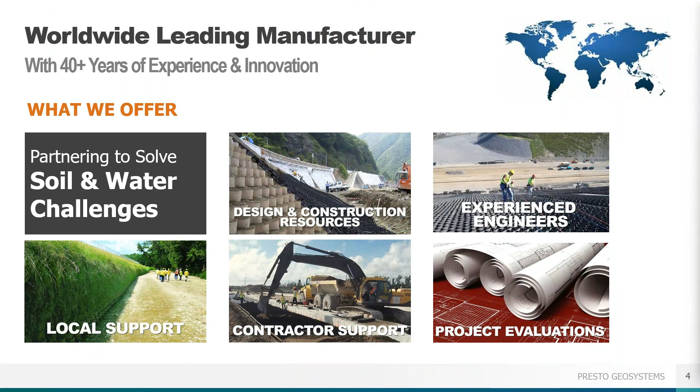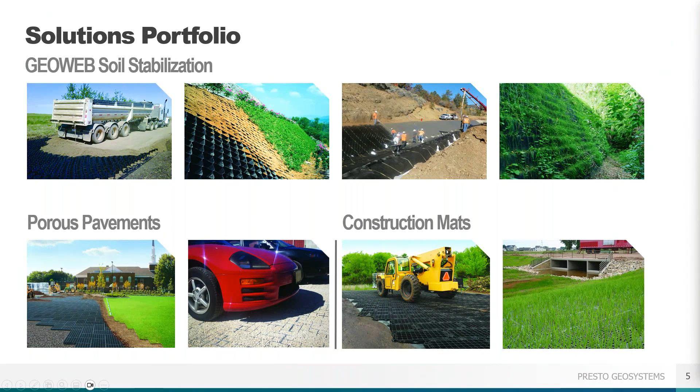So we operate in 4 main product areas. We talk about load support, slope protection and channels, which we're going to talk about today. We also can do earth retaining walls, whether that's gravity or reinforced walls. We can also do steep and reinforced slopes. We have 2 different types of porous pavements. We have our GeoBlock, which is a vegetated solution, and GeoPave, which is aggregate. We also make some construction mats called GeoTerra for temporary access, and also some GeoRunner, which is also one type of slope protection, but we're not going to be touching on that in today's presentation.

First, we'll do a little bit of overview if you haven't really been involved with projects with Geocells, what they really are. So the products come in 3 different sizes. We have our 20V, which is about 8.5 inches, 30, which is 11.5, and 40, which is 18 inches nominal diameter. We have different cell depths from 3 to 12 inches. And we also have different section lengths from 18 cells up to 34 cells.

If it is a larger project, we actually can make a specific cell length, basically to reduce any type of waste you may have with the panels. So we do offer a free project evaluation for all of our projects, no matter if it's 500 square feet or 5 million. It's going to include a written summary, calculations, cross sections, specifications, and this evaluation will determine the appropriate cell size and depth for your project.

I really do, and I'll probably say it a couple times, please don't use any standard tables or graphs when you're doing a geocell project, because really every site is different. Especially on slopes and channels, depending on what's underneath it, the anchorage is going to be different. So whenever you don't use standard tables or graphs, we're available. These evaluations are always free. We can turn them around typically in about a day or 2.

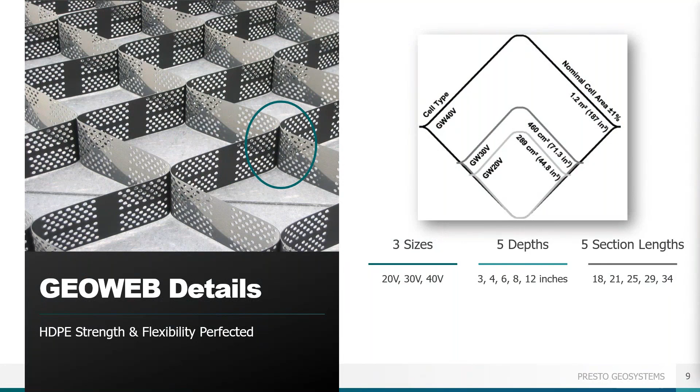So the ultrasonic welded seam that connects all the cells together, this really is crucial to the functioning of a geocell. The stronger the seam strength, the better performance, period. You've got to have a strong seam. We are made from 100% virgin HDPE, which provides the strongest seam strength. If the cell wall is too stiff, it can overstress the seam and potentially cause failures. That's caused by people adding things like calcium carbonate to it, or things to lower the cost. So it gets too stiff, and the seam can actually rupture in the field.

So the second characteristic is the infill material. There are 4 basic types. We can fill it with coarse sand for load support applications. When we invented this with the Army Corps of Engineers back in the 70s, we actually called it sand grid until we went commercial with it in the 80s when we changed it to GeoWeb. So for any kind of load support, we can use coarse sand.

For slopes and channels, we can use topsoil and vegetation, usually with some type of surface protection like an erosion control blanket, a TRM, or hydro seeding. We can also fill it with aggregate. I'll talk about the research we've done for both of these. And also, if it's a really hard armor system, if you really need some big time protection, maybe against erosive flows or high tractive forces, we can actually fill it with concrete.

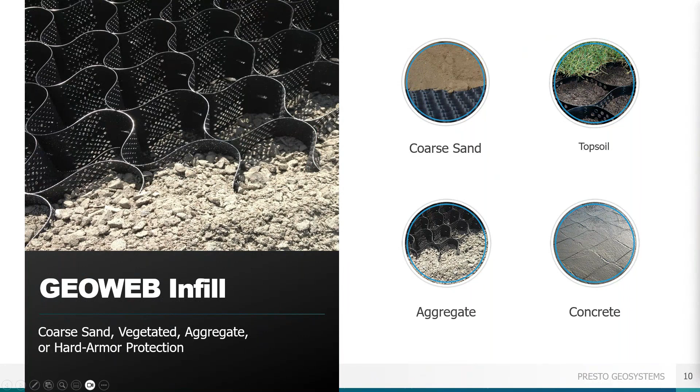Here you can see a typical panel, comes tri-folded on a pallet. Each panel is about 8.5 feet nominal width, with different cell lengths. Like I said, it comes trifold on a pallet, so it ships very efficiently.

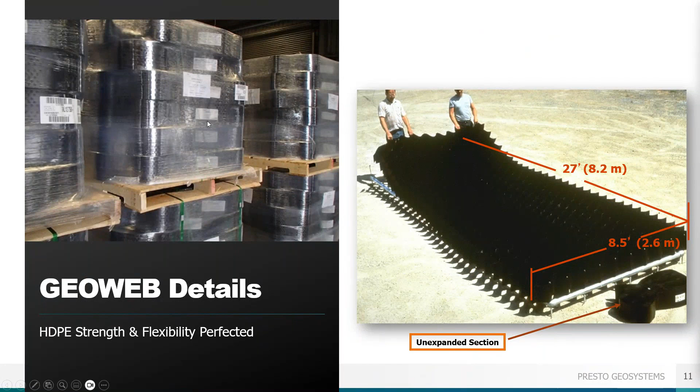We actually do have a factory here, located in Wisconsin. We build all of our GEOWEB, so it ships very efficiently out of Wisconsin. All our accessories and the GEOWEB are 100% made in the USA under a strict QA/QC program. They do comply with the Build America, Buy America BABA Act. So if you have a project, all of our accessories, all of our everything is made here in the US. We don't offshore any type of materials. We can provide certifications for you if that's required.

It's manufactured from high quality virgin HDPE. It's proven the durability over the past 40 years. We've looked at different ways to maybe make this different, but it comes right back to the same formulation every time we test it. 100% virgin HDPE is the best quality, gives you the best seam strengths. It lasts hundreds of years.

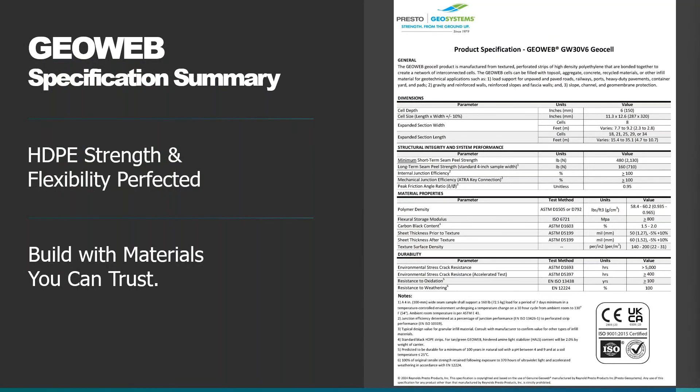The carbon black is added to protect it against UV, but really a lot of times it's buried in the ground. So even with 24 hours sun exposure, GEOWEB lasts 100 years before the carbon black is degraded. So it's going to be in the ground for a very, very long time.

All of our components are actually engineered depending on the type of application you're looking at. This is for slopes and channels. Here we have the ATRA stake clip, and I'll talk about that. We have our ATRA key and tendon clips, but all these accessories here are actually engineered for direct use with Presto GeoWeb. So whenever we do a project, these are all the accessories that you'll see.

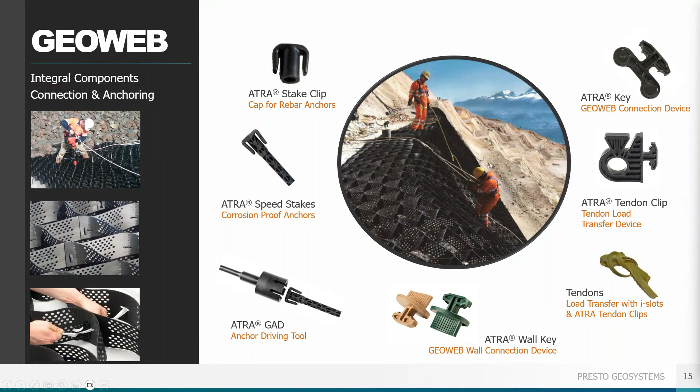All of these accessories we actually engineered from scratch. None of them are off the shelf. All of them are used with our design evaluations.

So the ATRA key, that really is the crucial point. That really makes sure that the panels stay together. It really does speed up installation. Made from plastic, so they're going to last pretty much a lifetime. It really helps to make sure that the panels remain securely connected and they don't separate.

And it really does avoid corrosion. When we first invented this, we used to use metal staples, but over time, that's going to corrode. So you want to stay away from metal staples, and also zip ties - zip ties aren't made to attach geocell panels together. You want something that was actually engineered to connect GeoWeb panels, not a zip tie off the shelf.

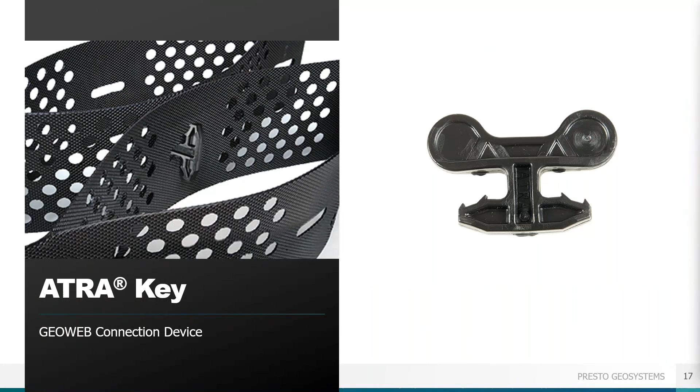Here's another close-up photo showing the ATRA key. You can see that one of the most recent innovations we had is we added these frictional barbs right here on the inside of the capture key. So it basically just gives you a little bit better interlock between the different panels.

When we do our evaluations, we're looking at the seam strength as the biggest thing. So we're looking at factor of safety for connection failures, like shearing, splitting, or tearing. We make sure that the ATRA key has a high enough factor of safety that you never have to worry about panel separation in the field.

These are some anchoring, we call them ATRA speed stakes. They're made out of plastic. Typically used on 2-to-1 slopes and less, unless there's a liner. We're going to usually anchor it, unless it's a very, very long slope. These are, like I said, 100% plastic. They have frictional barbs on them to enhance the interlock.

You can see we have an ATRA stake clip molded right onto it. Here's an ATRA stake clip. The ATRA stake clip fits onto a number 4, so a 1/2-inch rebar. We also have this little GAD that goes on, and you could actually drive these in with a Hilti hammer, a pneumatic hammer, versus having to drive in with a hammer. So they go in very fast.

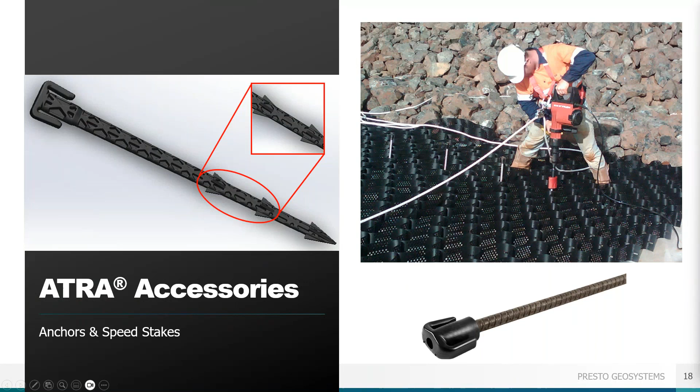So all these accessories are for less than a 2-to-1 slope. If you get over a 2-to-1 slope, usually, or over the top of a liner, we're typically going to use tendons and ATRA tendon clips. So what the tendons do is they run the length of the panels, and we connect these ATRA tendon clips.

We tie them off on a specified number of cells down the slope, and we'll tell you in the evaluation how many cells - typically anywhere from 4 to 8 cells. You can have an Atra tendon clip, and you can see how the tendon just twists around the Atra tendon clip.

What this does is it transfers the weight of the soil infill and the GEOWEB panel up to the crest of the slope. We're typically going to have a pipe dead man buried up on the crest of the slope where we can tie the tendons off.

If a pipe dead man doesn't work, a lot of times we'll use earth anchors. So we'll work with you and your earth anchor manufacturer to make sure that we have the correct strength.

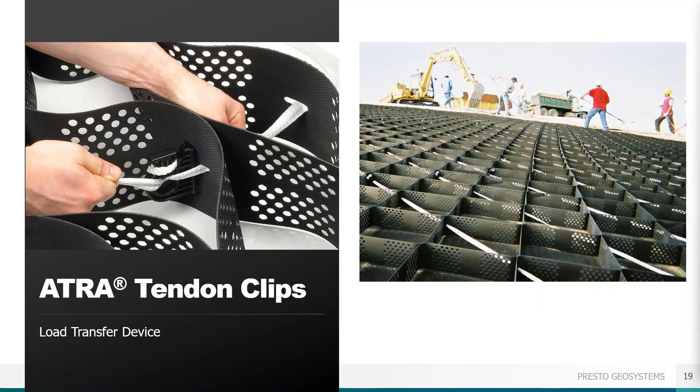One of the best things about our system is that we've tested it over the last 40 years. Some of the most recent testing we've done is at the Colorado State Hydraulics Lab. Pretty much anything that's subjected to water is tested at this lab, and Dr. Thornton is worldwide renowned as far as hydraulic testing.

One of the good things about it is it's located in Fort Collins, Colorado, but it's located about a couple hundred feet below the Horsetooth Reservoir. So it has a couple hundred feet of static head to actually serve the flumes inside of this building, and they also have some outdoor flumes.

So we tested all the different types of infill for channels and slopes. We tested topsoil with a TRM, we tested aggregate, and we tested concrete. The first one I'm going to talk about is vegetated infill.

Here you can see the first step is we took their flume box, filled it with topsoil, covered it with a NAG C350 erosion control blanket. What we wanted to do is see what the ability was to withstand high velocities and shear stresses, tractive forces. But the other thing we wanted to look at is how we compared to riprap.

You know, a lot of projects we do around the world, riprap is becoming hard to find, and it's becoming very expensive, not only to purchase but also to transport and place. So we wanted to see how a vegetated GEOWEB system would compare against different sizes of riprap.

So we did a total of 10 tests. Each test lasted an hour. We varied some conditions - the bed slope, the slope angle. We did testing in accordance with the erosion control blanket standard for ASTM, which is D6460.

That standard is based on two things. We had to have a soil loss after the 10 one-hour tests of less than half an inch, and we had to have a blade density of at least 300 blades per square foot. So we had to meet those conditions after 10 one-hour tests.

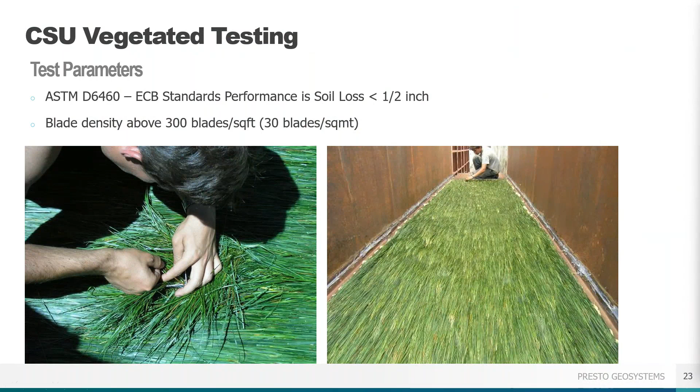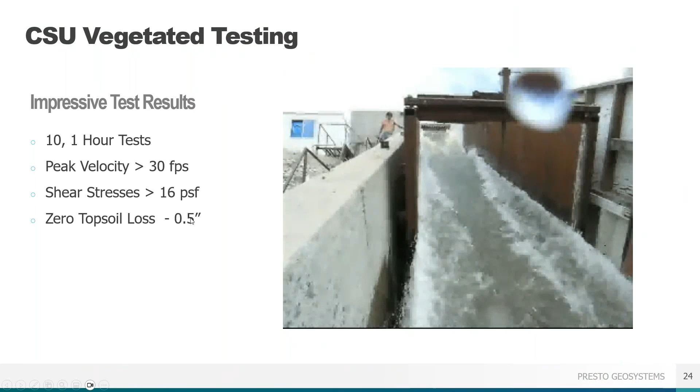So like I said, we did 10 one-hour tests. We had velocities over 30 feet per second. We had shear stresses approaching 16 PSF, and we actually had zero topsoil loss, and we always had more than 300 blades of grass per square foot. So it's a very successful test.

Here's really a quick comparison when we're looking at the allowable shear stresses, which is in blue, and the velocities here in red. Here you can see a 12-inch riprap, shear stresses of less than 5 PSF, and velocities less than 15 feet per second. When you look at GEOWEB and the C350, we were more than 3 times the shear at over 15 PSF, and double the velocity, approaching 30 feet per second.

So, you know, if you have a temporary installation where you've got to put riprap and you're having a hard time finding it - it's really a big cost issue for a lot of places - and it's not fully underwater, a vegetated GEOWEB solution is able to replace riprap. We actually have models that we can go through and determine the size of riprap that's needed for all of your installations.

And here you can see this was the NAG C350 TRM. Basically, we doubled the performance of that erosion control blanket. So a very successful test all around.

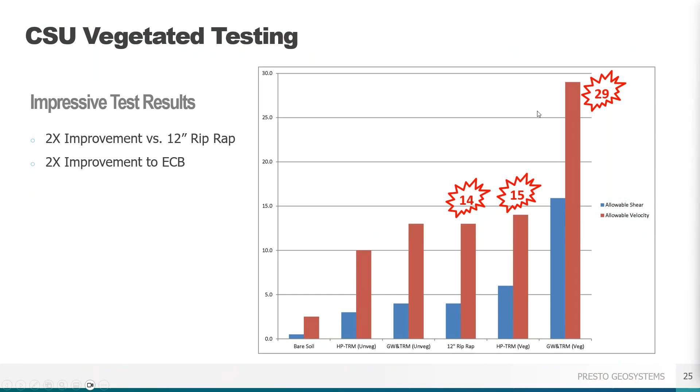Just to talk about a couple vegetated slopes and channels - we do a lot of work down in Florida, around Texas, the Gulf states where you get a lot of hurricanes. We do a lot of stormwater channels. This project was a stormwater channel, with frequent hurricanes, channel floods, and severely eroded channel slopes.

So once again, we came in, got these side slopes excavated, put down the GEOWEB, filled it with topsoil. And how we do these channels most of the time is we have aggregate filled below the water line and up to about 1 or 2 feet above the normal water line to give it a little bit of freeboard, and then you can see the vegetated slope above it.

So as the hurricane water comes in and the water rises, the vegetated GEOWEB protects the slope. But we also have aggregate down here to protect the slope at all times when the water is flowing.

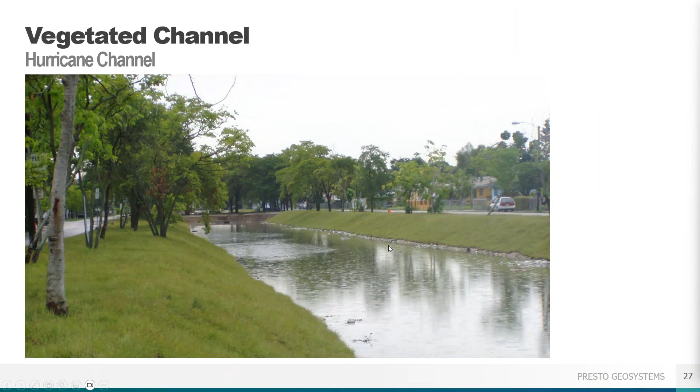We also do a lot of these, another type of stormwater channel. This is actually a retaining wall. Here you can see GEOWEB is very easy, it's plastic, so it's easy to cut for pipe penetrations or anything like that.

Here you can see a GeoGrid. This was a reinforced slope because the batter was less than about 20-25 degrees, so you can see some GeoGrids holding it back. They fill the back of the walls with free draining material for reinforced slopes, but the front we can fill with anything from topsoil to aggregate to concrete.

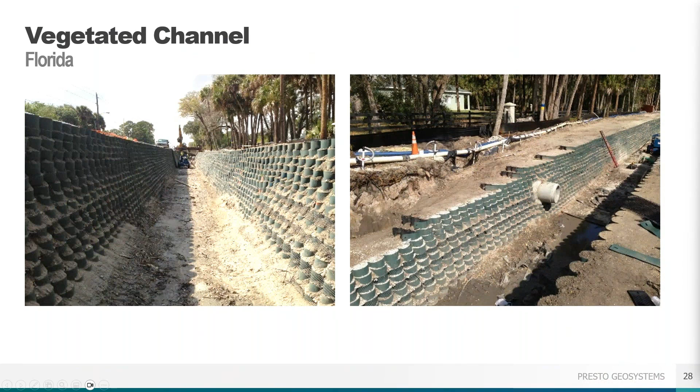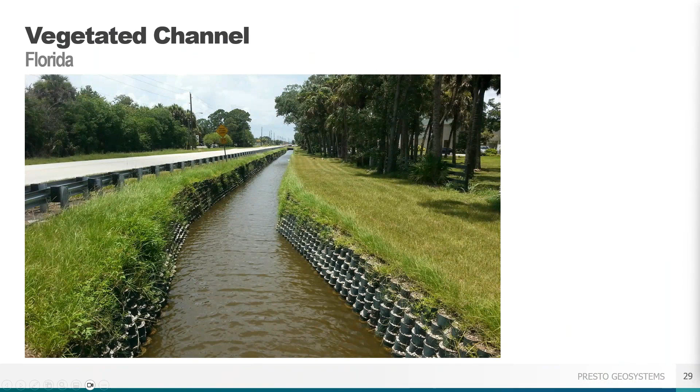They wanted a vegetated solution, so we did a mixture of aggregate and topsoil. Here you can see the channel, with still about a third aggregate, two-thirds topsoil mix visible. This was taken a couple months after the channel was done, and here you can see full establishment of vegetation.

So most of our GEOWEB slopes and channels, you're not even going to see them. They'll be covered with vegetation if that's the intent. The GEOWEB really provides a good way for that vegetation to be held inside those cells. We have tens of miles of these hurricane channels all around, whether it's the slope channel or the reinforced slopes like this one. We've had very successful installations. If you have any type of channels like that, we'd be more than happy to help you out.

This was a very interesting project, we'd like to show this one. This is out in Vegas. When they get water out there, it's usually a lot of water at one time, like when snow melts coming from up above, they see a lot of water.

What happened here is a lot of water was flowing down this area. It's on the north side of the strip, and across this wall are some very nice houses. An engineer from the city looked at doing something here. The original intent was to maybe do some gabion baskets, but the neighbors found out what that was going to look like, and that wasn't something they were happy about.

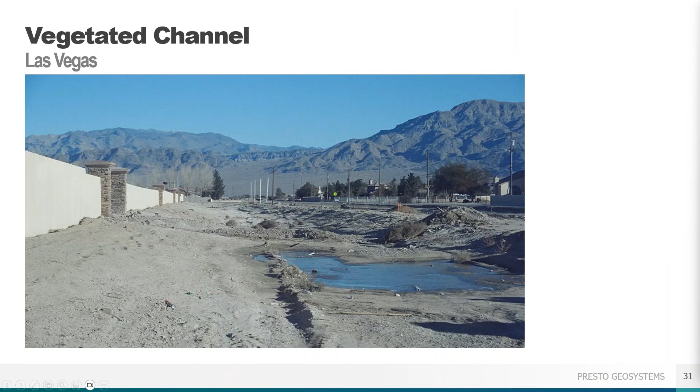That went to the city and the engineer, and they came to us, and we turned it into a park. Instead of using gabion baskets for this whole area, which would have been pretty much a useless area, we were able to turn it into a park. You can see they wanted quick vegetation here, so they sodded it, and put a sidewalk down it. Every time the water flows, it comes through this area and flows right out with no issues at all. We were able to reclaim some land for them to use as a little exercise and park area.

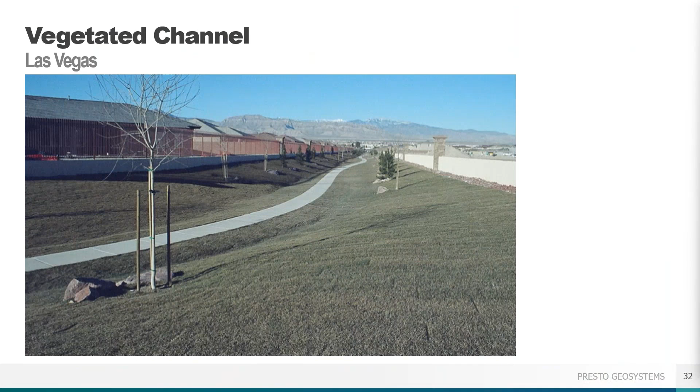This is something we come across all the time: people will try to do this on steep slopes. This is an airport in Colorado, and they were having really big issues with this site. They tried all kinds of different things. They tried hydro seeding without anything else, but the slope was too steep and the hydro seed wasn't holding. They tried a wire mesh, and you can actually see the wire mesh if you look close, but the same thing happened, it didn't hold.

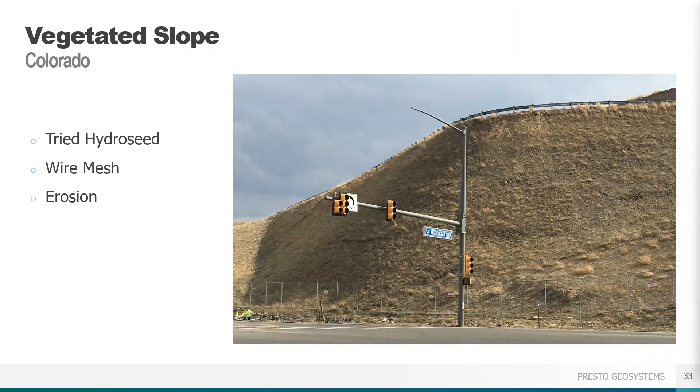So they approached our distributor, and we did a free project evaluation for them. Due to the height of the slope angle, we used tendons and our tendon clips. When you do these slope projects, you're always installing from the top down. You pre-assemble the GEOWEB panels on the crest, get a dead man pipe or earth anchors installed, tie it off, and then basically throw the GEOWEB panels down the slope and pull them down.

So all the tendons or the ATRA tendon clips can be installed on the top, meaning everything can be done from the crest of the slope.

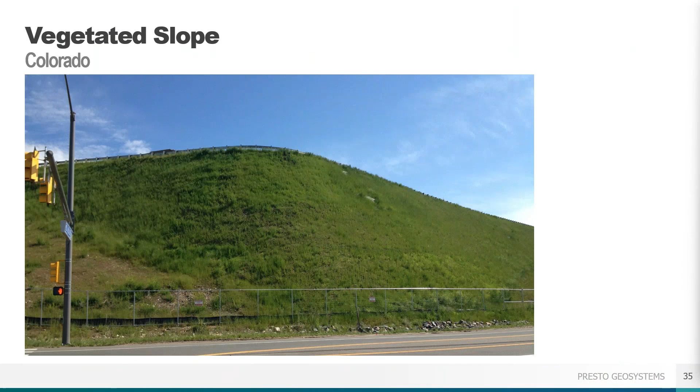Here you can see the finished solution. You can already see vegetation establishing. This was on the northeast side, so it's not getting a lot of vegetation, but this was taken maybe 4 months after, so it's really vegetated and finally had a solution that wasn't sloughing off when they'd get heavy snows or snow melt or any kind of melt from the airport.

This was a mine closure site we did down in Peru. This is a really tough one. It had 4 25-foot high terraces. Terraces were a little over 60-degree slopes, so very, very vertical.

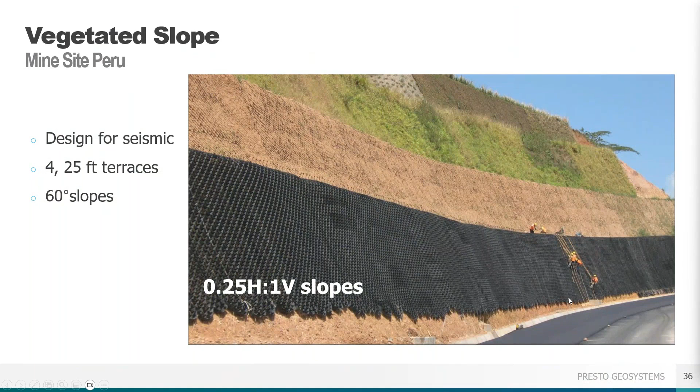Here they wanted a vegetated solution. It was a mine reclamation project, so there were specific guidelines they had to adhere to. So we did the free project evaluation. Here you can see looking from the crest of the slope as they're installing it. All 4 terraces here were designed somewhat the same.

They were all the same as far as the lifts and the slope angles. So you can see these 2 were already constructed and vegetated. This one is just starting to vegetate, and the GEOWEB coming up here. Once again, we have tendons with tendon clips. This was buried to earth anchors at the crest here.

You can also see they put down a coir fabric and some rock, basically because water would be coming down. It was directed through these channels all the way from the top to the bottom. A lot of water did come down the slopes too, because during the rainy season you're going to get a lot of water, so we had to design for that in our evaluations.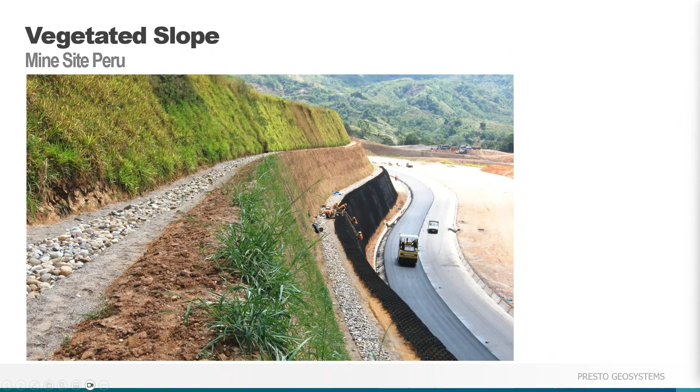They also put in a biaxial geogrid to have a little bit of extra stability under the panels. And here you can see the final installation taken about a year later. You can see it's fully vegetated. They went through a rainy season without any issues, and that GEOWEB is still working great today, about 8 years after it was installed.

Here's another typical installation. We do a lot of liner protection, whether it's on coal ash plants, landfills, any type of liner. If you need some protection, we can put GEOWEB. We can add topsoil and vegetate, or we can add aggregate. Different solutions we've used. We have lots of case studies here.

This one, they wanted a vegetated solution, so we put down a non-woven geotextile to protect the liner, then the GEOWEB. And we ran tendons, once again, with the pipe deadman at the crest of the slope here. The pipe deadman was buried into the liner trench. One recommendation I'd make is that if you're putting in a liner, especially if it's got any slope to it, try to use a textured liner.

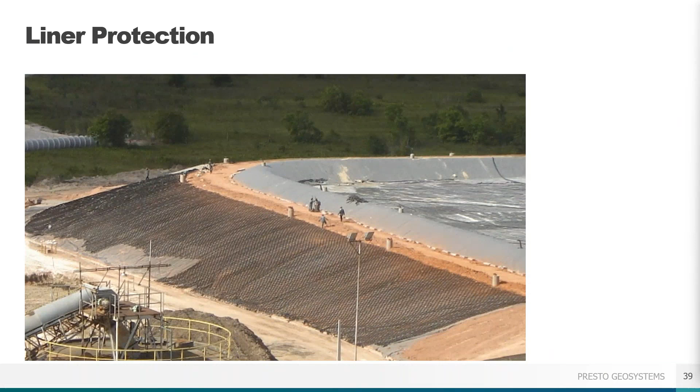The friction angle between any type of surface protection, say for instance GEOWEB, and a smooth liner might be in the low teens. But if you use a textured liner, they're in the low 20s. So it's significant when you're looking at trying to anchor in the anchor trench. Usually we can always anchor in the same anchor trench as the liner, but once again, we'll do a full project evaluation to let you know what the anchorage requirements are. And this is the installation after vegetation was established.

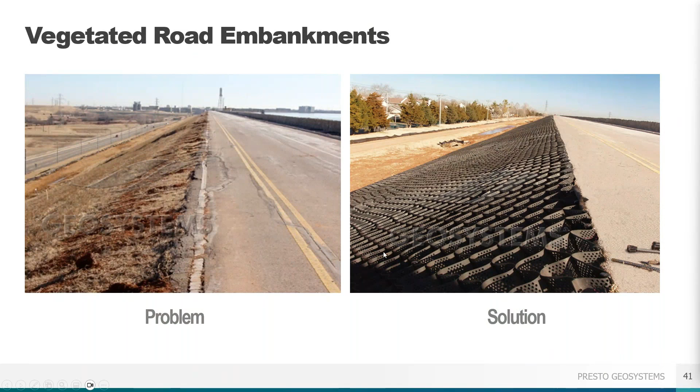Seems like we're always doing one of these every single day. We're working on one of these projects around the world. So you can see this is a 2-to-1 slope, and we used the Atra stake clip and number 4 rebar on this one, driven in on about a 3x3 cell pattern. So you can see the problem, the solution with the web, and then what it looks like after it was vegetated. Another successful project.

We do a lot of roadway embankments. This is actually on a railroad, out in Montana. This is roadway and rail, but this is for the rail. You can see they wanted a vegetated solution. Once again, this was also a 2-to-1 slope. You can see down here, we did use tendons on this one because they didn't want to have to go on the slope, so we actually used tendons for the installation. But you can see what it was here, and then after vegetation was established.

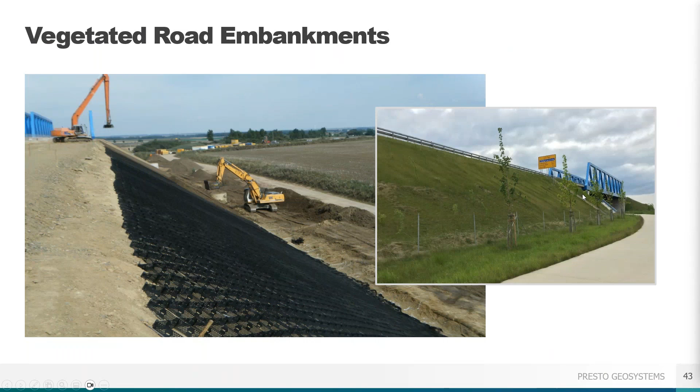We can also do very steep slopes.

So we can do very steep slopes. If you have something with very severe limitations, like trying to do something with a house above it, we can provide an evaluation for a vegetated solution.

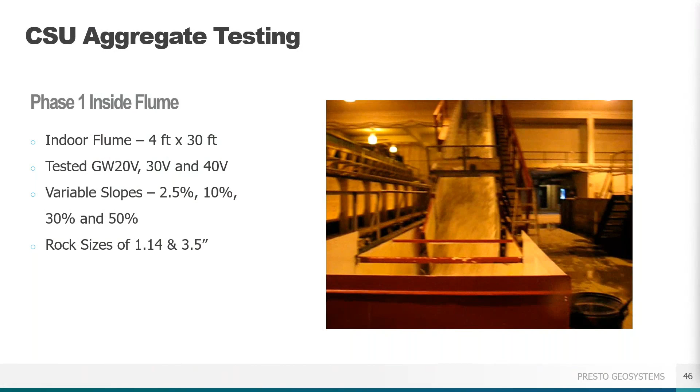So the next one is aggregate fill. Aggregate fill is a little bit different. We did different cell sizes. We varied the slopes from 2.5% to about 50%. We also changed the rock sizes. We ran, once again, 10 different 1-hour tests. You can see here what it looks like as the...

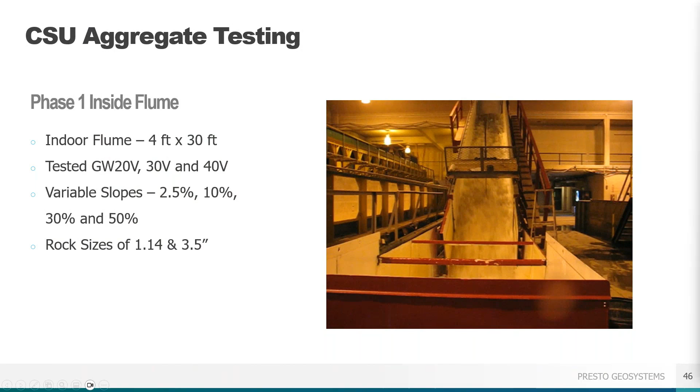So what we found out from this one is that we actually maxed out the flume inside at Colorado State, so we went to the outdoor flume. We did 5 total tests, keeping the slope pretty consistent at about 17%. Flows up to 125 CFS. We did the rock size at 1 to 2.5 inches.

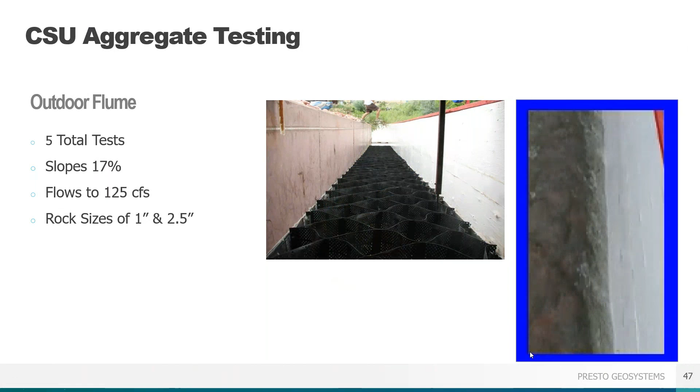If you look closely on this slide, I'll run this. This is one of the 5 tests. You can actually see the aggregate being confined inside the GEOWEB.

So the intent of doing the aggregate testing was twofold. We wanted to look at, once again, replacing riprap. We wanted to see if you couldn't use a vegetated channel, as I showed in the previous section for our testing at CSU, maybe under constant flow or a lot of flow. We wanted to see how we compared to riprap.

So, like I said, the output was Dr. Thornton and his PhD students did a linear regression analysis for us. Based on these velocities of 18 feet per second and shears to 16, we can actually reduce the rock size or riprap size up to a factor of 10 times.

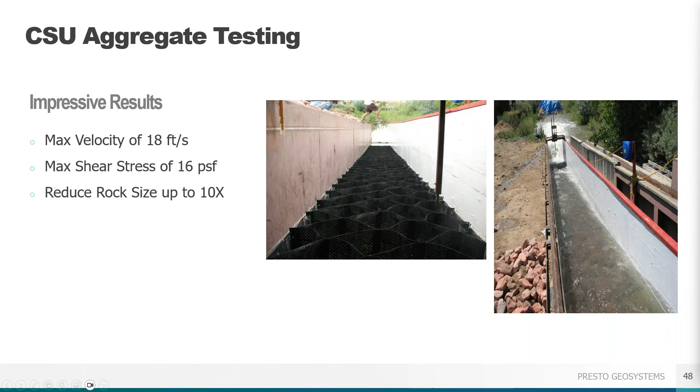So, based on your site, we can run this model, and I've run this model thousands of times since we've had it. Basically what we're doing, all I need is the slope, the flow rate, and the bed width. So if you give me those numbers, I enter the slope, I enter the flow rate divided by the bed width to get unit discharge.

I'm basically changing the size of infill material. What that does is show you a comparison between maybe 2 different formulas for size of riprap, the Abt and Johnson one and the Army Corps of Engineers. It also tells me what size of GEOWEB - remember we talked about the 20V at 8.5 inches diameter, to the 30V which is 10.5 to 11, and the 18-inch for the 40V. It'll tell me which one is going to be the best fill material for it.

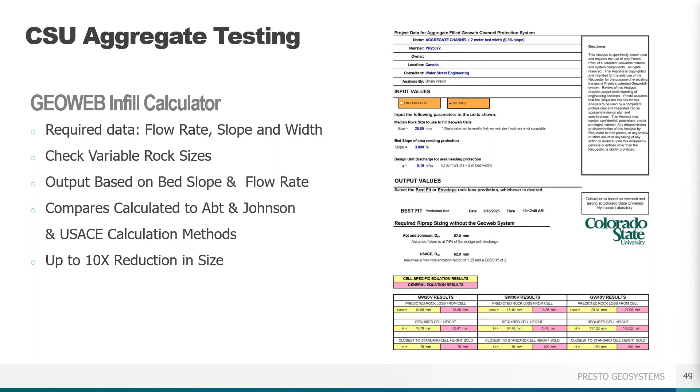From that evaluation, we can go ahead and provide a free evaluation for you that gives you the size of the GEOWEB, the depth, and the infill size.

So it's a project we did out in Arizona, for the Gila River Indian Reservation, south of Phoenix. Once again, just like that Las Vegas case study, when they get storms, they're very intense, leading to erosion and flooding in adjacent subdivisions. They also use this area as a roadway to get up into the mountains.

So they had to do something to repair it, and it was really critical because the flooding in the rainy season was going to come out in Phoenix, so they had to make sure. This one is about a mile-long channel, and it came from the bottom of these hills. It ran through, and a bunch of other channels actually came into this one.

So we did the full evaluation here. We recommended 2 different sizes of GEOWEB, a 6-inch on the uphill side and a 4-inch on the downhill side, where some of the other channels were coming in. You can see here the pre-folded panels. We did put a non-woven geotextile underneath it just because it was pretty sandy, so we didn't want to have any scour below it.

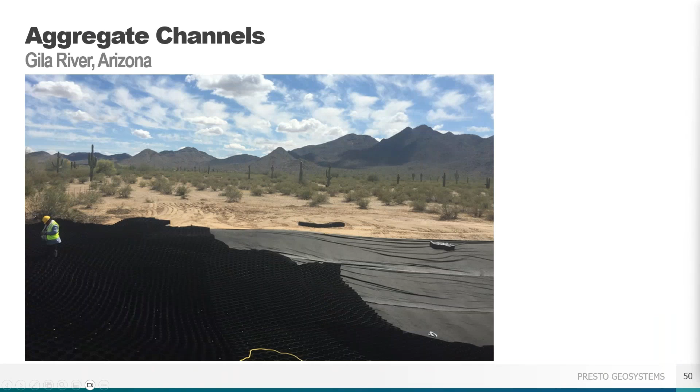Basically we just cleared the existing vegetation, got down to that sandy subgrade, graded it, and compacted it. What we did here, it was up to about 100 feet wide in certain areas, so it's a pretty wide channel. We wanted to have like 3-to-1 side slopes as the final grade. You can see these yellow hoses - that's for the Hilti hammer, a hydraulic hammer, because they're driving in anchors just to keep the GEOWEB from moving.

You can see the stakes. They're getting ready to be driven into the ground.

But on this one, we did about 42 different options, looking at 42 different stations and flow rates, bed sizes, and rock sizes to determine the best infill material.

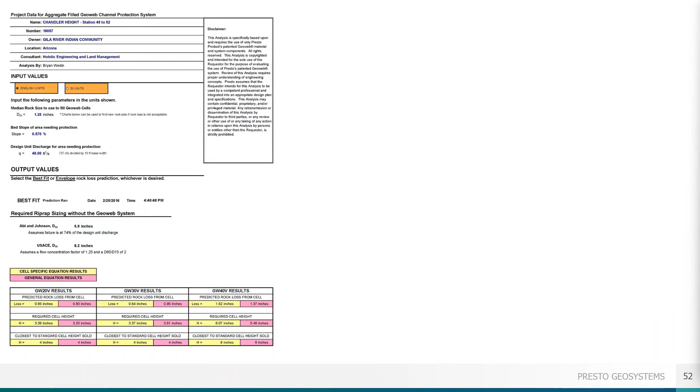So a couple of basic channel calcs. After running the calcs, we had all these different types of channels. We came up with some different rock sizes, but we actually settled on a local 1.25-inch crush material that was locally readily available and at a pretty low cost.

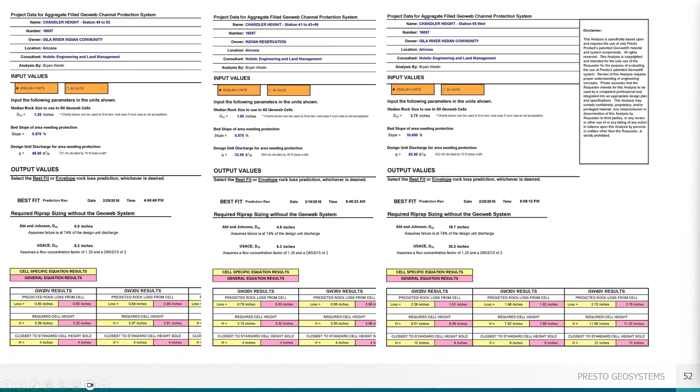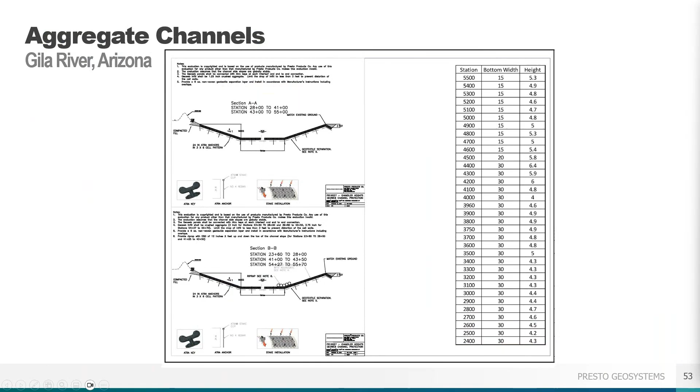We used that to fill the GEOWEB panels, and you can see here cross sections from all these different stations. On one of the sheets you can see different heights and bottom widths. Every one of these stations we provided evaluations for, to make sure we had the right rock size and the right cell depth.

And like I said, the infill was waste rock from a nearby quarry. It wasn't the greatest, but it was locally readily available, and it went down very quickly, saving them a lot of money. I mentioned before that they would use this route previously, before it got severely eroded, as a way to get up into the mountains with UTVs and vehicles.

So that's one of the really big advantages of using GEOWEB confined for aggregate. Once this is down, you can use it as an access way, so all the construction trucks - we looked at the CBR, the subgrade, and made sure this wasn't going to damage any of the cells.

So we're doing a load support evaluation in these cases, along with the slope and channel evaluation. It actually served two purposes.

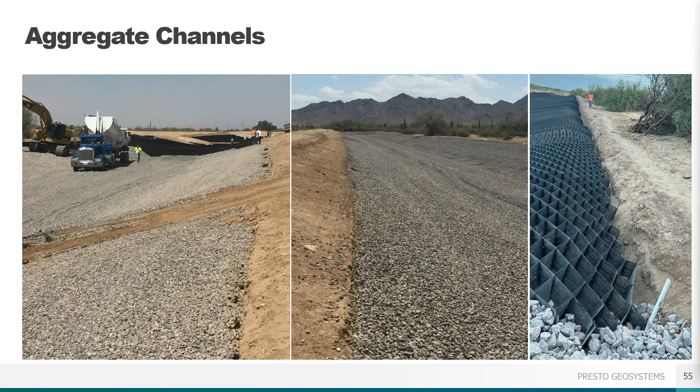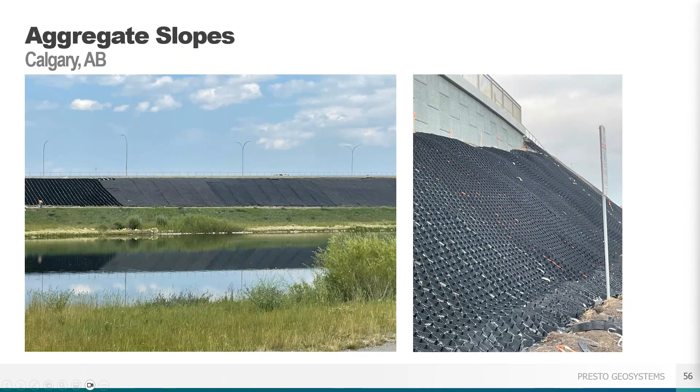We actually used different types of rock and different colors of rock for that installation - you see a light brownish and a dark brownish gray.

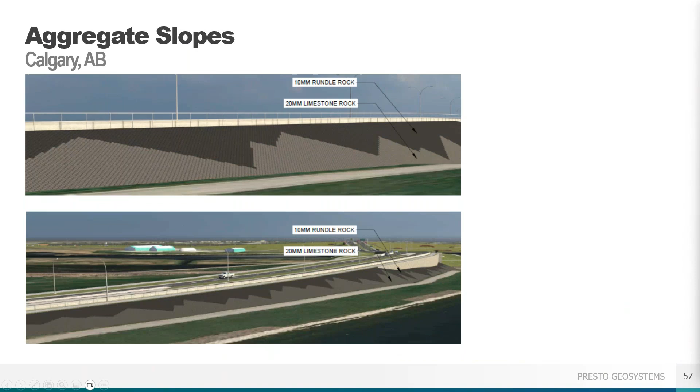This one we used a combination of tendons and earth anchors. You can see the tendons through the geopanels, non-woven geotextile, and the anchor clips tying off. We actually used earth anchors driven at the crest of the slope because we didn't have anywhere to dig or to do a pipe dead man, so we tied the earth anchors to these tendons.

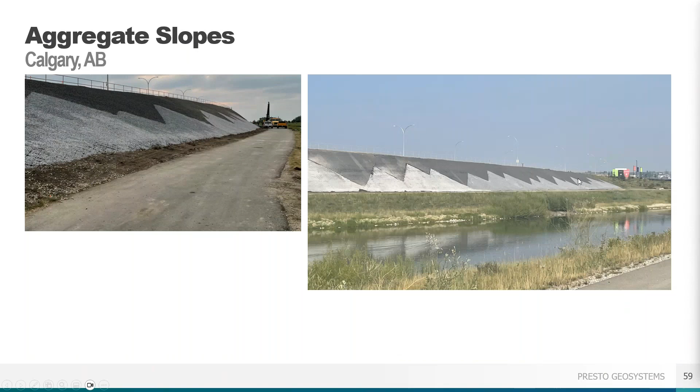And here you can see what it looked like after everything was constructed. It actually looks really cool, especially at nighttime - when you're looking at the Rockies, you can actually see this. Really pretty cool.

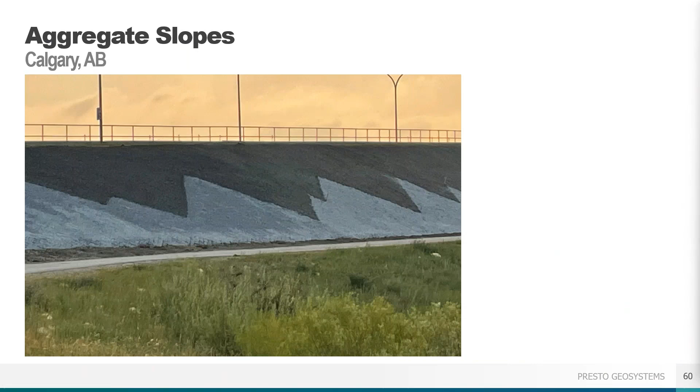So we actually do something like that - if you have a project where you want to make it more decorative, we can work with you and your architects to come up with a GEOWEB slope system or a channel. Once again, we do a lot, just like the vegetated ones.

This is a project over in the Philippines - they could never get vegetation to grow here, so they ended up doing road shoulders not only with vegetation, but also with aggregate, especially in areas where you don't want animals getting up. Most of our railroad shoulders are going to be rock, because railroads don't want to see deer and things getting up onto their tracks - a lot of it's going to be aggregate.

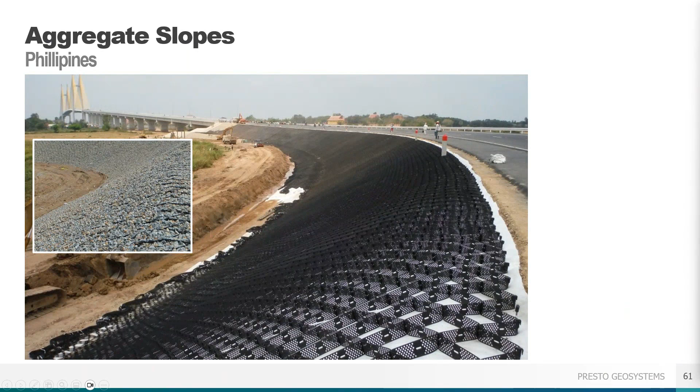Once again, bridge abutments - we do a lot of bridge abutments. We've done concrete bridge abutments too underneath, but we also do full gravel ones. So if you want to save some money - if it's a federal project, we get federal wage rates - we can look at that, and I'll show you the concrete next. But this will save you a significant amount of time rather than having to form concrete under these bridge abutments.

Last one I want to touch on is concrete infill GEOWEB for slopes and channels. This one is pretty straightforward. What we want to do here is have a very robust system that we could use to compare against concrete - I mean poured, cast in place concrete, rebar, all the formwork. So we use the GEOWEB as the formwork.

We did 3 tests on the outdoor flume. We maxed the slope at 2-to-1. We had all the pumps running and maxed the flow out. We're the only geosynthetic today to max the flume out. We hit velocities approaching over 36 feet per second - that's all it could get to. Shear stress is over 21 psf, and like I said, we maxed that flume out. This was only a 3-inch deep GEOWEB.

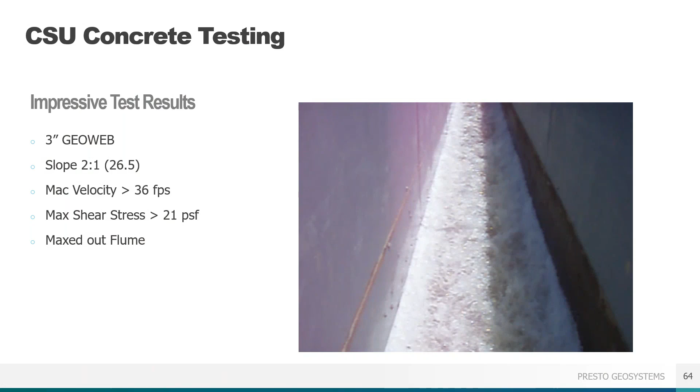So if you have a really challenging application, whether it's a channel or slope, maybe subject to very high flow rates, a lot of scour, a lot of tractive forces, we can look at doing a GEOWEB system. This is going to save you a lot of money because GEOWEB is the formwork, it is the reinforcement. You're pouring it, screeding it right off to the top of the GEOWEB. You're actually going to see a little bit of the GEOWEB because anything above it is not confined - you can see right here, a little circle, little diamond shape.

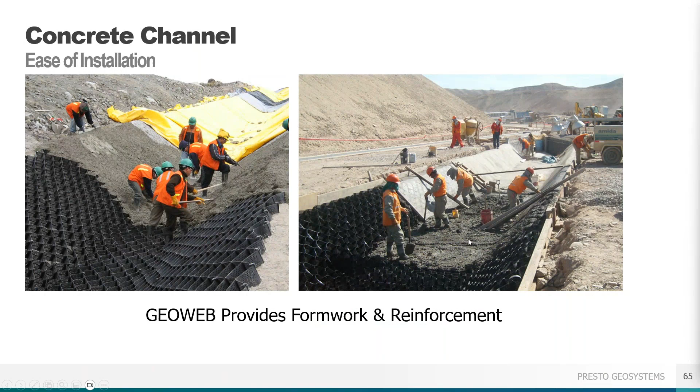So that you're going to screed right to the top. You can see the installed, typical concrete installation - you screed it, take a board and screed it right to the top surface. Here you can see they're doing normal installation. These are about 60-degree slopes here on this culvert outfall. What they did is place this by hand, and then hand trowled it into the GEOWEB to make sure it was all nice and vibrated into the cells.

What we tell people is that it's going to be typical standard concrete, nothing special - typical air contents, typical water contents, slump - you're basically just going to adjust it in the field. And it's pretty fast installation.

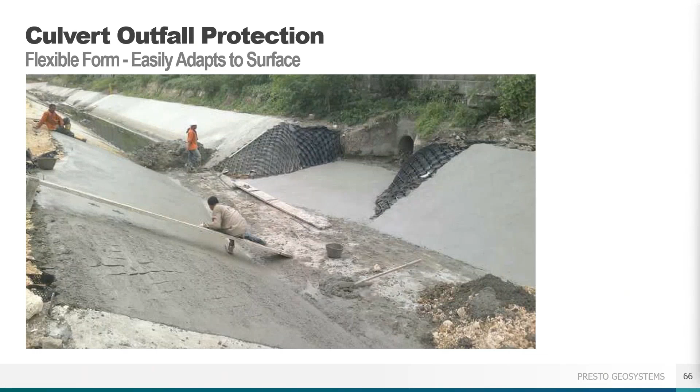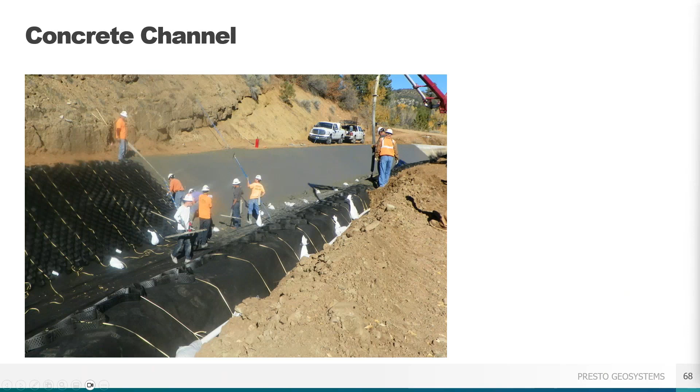So you can see a full concrete panel on the sides and just the liner on the bottom. These are pretty much 100% underwater, so there's always water flowing except in the wintertime. But here you can see it after installation - as I mentioned before, you can sort of see how they troweled that right to the top of the GEOWEB channels, or the top of the cell. And you can see the finished installation with water flowing down it.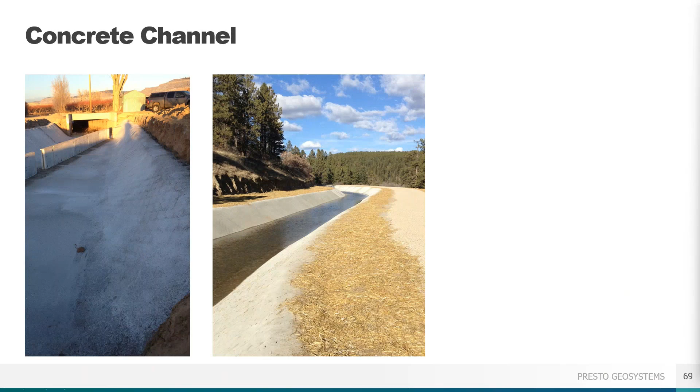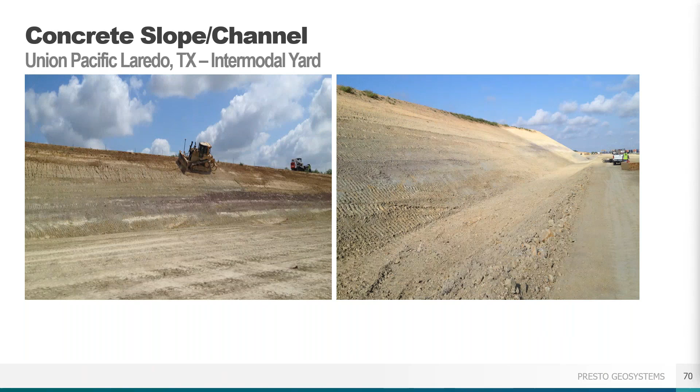This was another interesting project for a railroad down in Texas. This was a couple of million square feet project that they were originally going to use concrete, poured concrete in these channels. So they're going to use 6-inch reinforced concrete - formwork and rebar - and then 4-inch grout bags on this slope. So they came to us after the bid.

The contractor, we do a lot of work with them, asked if we had anything - what about GEOWEB for this slope and this channel. We actually did an evaluation, and it was accepted. Here you can see the slopes were basically excavated out, 2-to-1 slopes, varying height, but around 20 feet.

When they did the evaluation, we saved them millions of dollars because they got rid of all of this reinforcement. This is a huge area. It goes all around this intermodal yard.

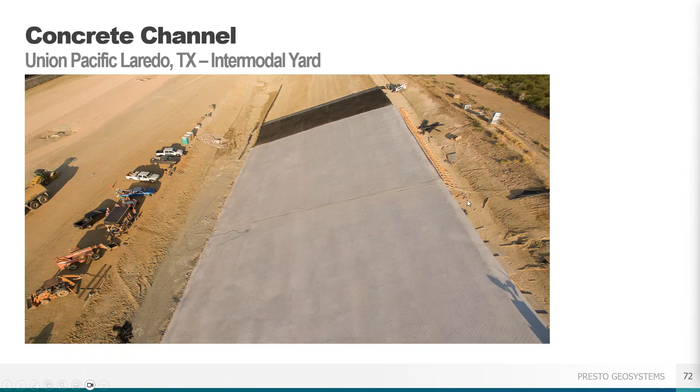So we went with 4-inch GEOWEB in the channels, and 3-inch GEOWEB on the slopes. It not only saved them money but reduced the amount of concrete they poured, since they're only pouring 3-inch here and 4-inch GEOWEB in these channels. You can see in the next slide just how big this area was.

Once again, it's very easy to pour around these. Just butt that on the GEOWEB panels right up to any culvert pipes and pour it. You can see once again, non-woven geotextile underneath it. It's not required, but it's not a bad idea.

How we size these, we want to make sure that groundwater isn't an issue, so we'll put some type of weep hole in this. We've also used mud valves, believe it or not, like these on water tanks or clarifiers, to let any kind of water come from below and flow up into the channel. So we've got multiple ways we can reduce pore pressure if pore pressure is an issue under the GEOWEB.

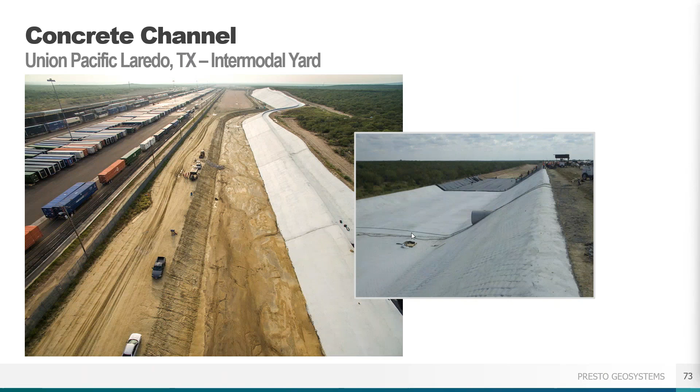Here's another interesting project, down in North Mexico, about a little over 500,000 square feet of GEOWEB. This was also for a mine, but this one had velocities up to about 25 feet per second, so they couldn't go with an aggregate channel due to the slopes, but they had to have something hard armored. They couldn't have vegetation.

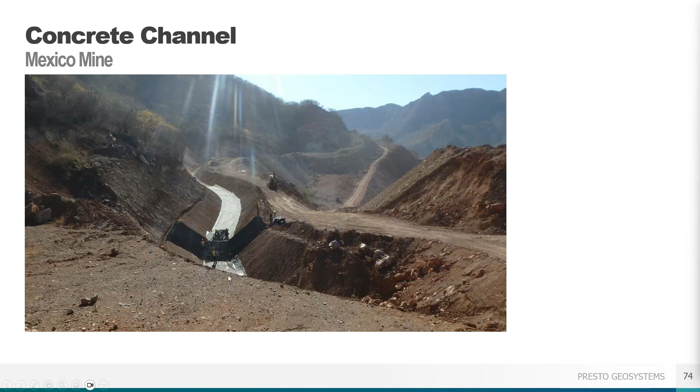So what we did for that one is we looked at a concrete filled GEOWEB solution. These are a little bit steeper, going up 2 to 1, 2.5 to 1, 1.5 to 1 in certain areas. You can see they did put a liner on the bottom of these channels just to protect the base. You can see they're pouring them in sections, so you can see how the GEOWEB tendons run here because of that liner. They ran the tendons all the way through, so a dead man on each side of this channel.

There you can see them just pouring. The good thing is you can actually stop pouring and start repouring with this system, and it doesn't matter because it'll actually flow through the cells. So you just leave some of those cells open, and start up the next day - all you're doing is starting again and having another pour. Same thing with construction joints - you don't need them, because in GEOWEB every single cell really acts like a construction joint. So you don't need any type of construction joints for a GEOWEB.

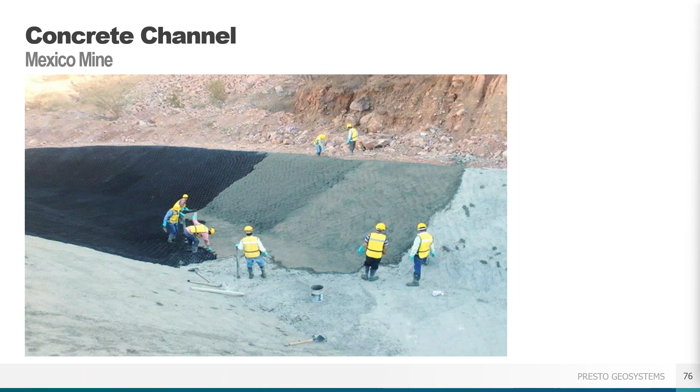This was also interesting because when we came to the end of this channel, we wanted to make sure we didn't just move the scour from the channel to the end of the channel. We were getting down to the bottom, so we designed this really nice energy dissipation system. But it got to the point where they were behind schedule, and we talked to the contractor and engineer, and then we just used some big boulders to stop the flow, basically to dissipate that energy. We wanted to make sure that when the velocity got out of here it was very low, so it could just flow out and down at the bottom. It's pretty easy to do.

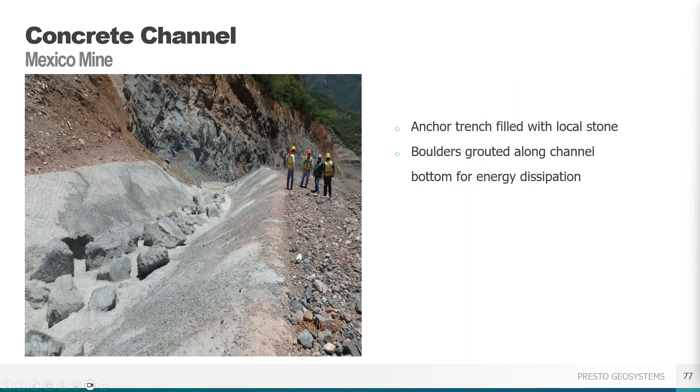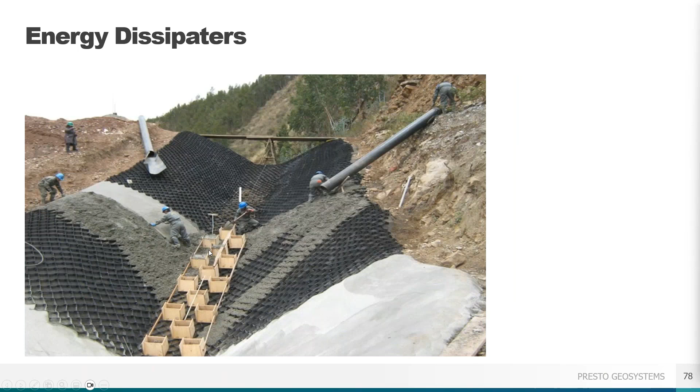But here's what an energy dissipation system typically looks like. We use the Army Corps design for this one, so we're sizing not only the size and depth of them, but the spacing of them. You can see here they're actually pouring these independently. A lot of people will also pre-form these away and just dowel them in, so there's different ways of doing it, but here's what it looks like after it's poured - each one of these is energy dissipation.

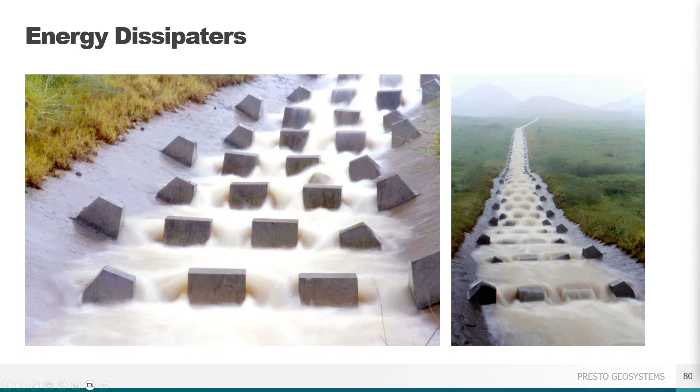So with that, I just want to talk about some of the advantages. It really is flexible in the design. We've got different cell depths, different lengths, different sizes. Depending on what type of channel you have or slope, we can use topsoil with some type of surface protection, like erosion control blankets, turf reinforcement mats, or hydro seed. We can use aggregate, and we're going to use the size that's right for your site. So if you have a scupper coming from a bridge abutment that's only going to be 200 square feet, we'll still run the model for you to tell you the depth. If you can use an aggregate to reduce riprap size, we can also run it for that, or we can fill it with concrete for the really challenging problems. So it is a complete system.

That free evaluation, like I said, please don't use any standard tables or graphs. We're going to give you that written summary, the calculations, and the drawings. We're going to give you the type, maybe if you have a geotextile, the type of anchorage you need. Everything that's involved in the project, we'll help you out with. And as I mentioned before, we'll work with our distribution network and make sure that all the necessary products are included in the evaluation.

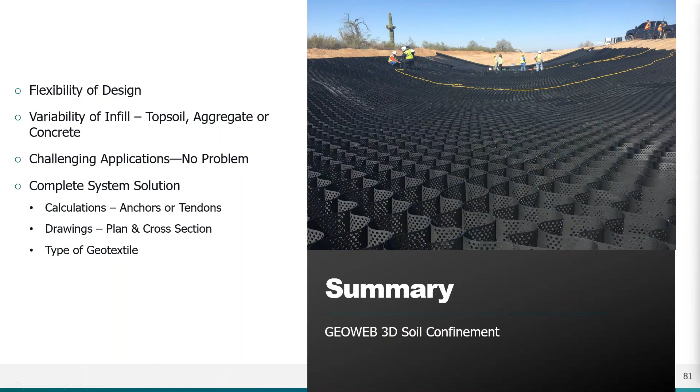If you're interested, I do have certified summaries, independent research summaries from Colorado State that Dr. Thornton put together after his research. I have it for vegetated, aggregate, or concrete. So if there's something you want to know, just let me know and I can get you a copy. They're also on our website at prestogeo.com under the channel application.

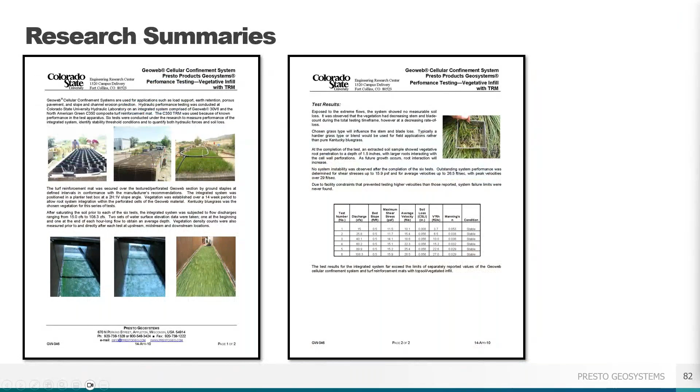Here's our website, prestogeo.com. If you go to the design tab here and click on channels, it'll show you those research summaries. We have a great website. If you want to sign up, the webinar today won't be on here, but there's hundreds of videos and webinars you can take.

You sign up and it'll actually keep track of all of your PDH credits. So if you need that, that'll be in here. You can take as many webinars as you want, and it'll keep track of you. You have product tabs, application, design, and installation tabs. So if you're interested in that, please let us know.

If you want to get a free project evaluation, you just click right here, and it'll bring you to this site, just fill it in. You can actually attach geotech reports, maybe some drawings, or anything you want. Anything you can attach is helpful. Within a couple of days, we'll get back to you with a full evaluation.

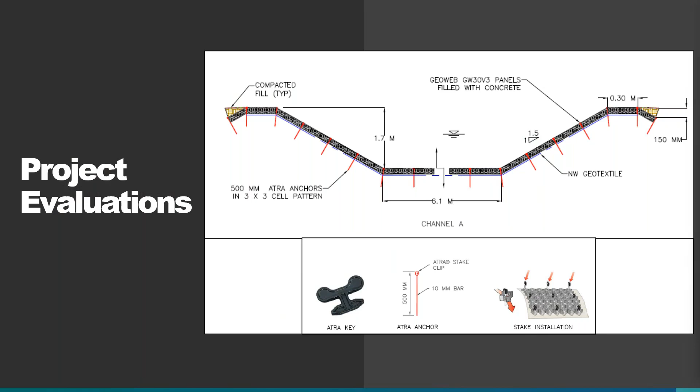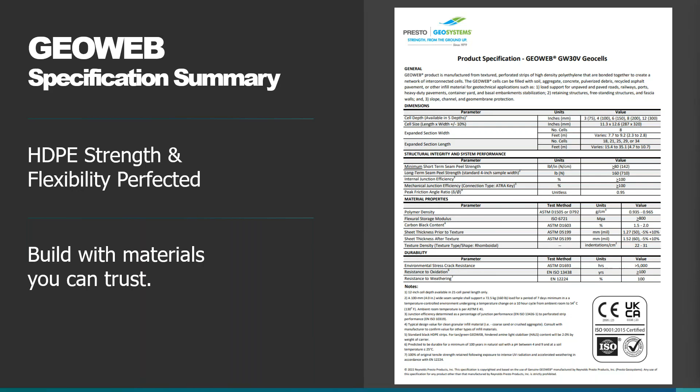Like I said, we've been doing this for 40 years, and we guarantee every shipment meets or exceeds our specs. We will provide evaluations for every single project, so please take advantage of that. Reach out to us and we can do that, usually within a day or two.